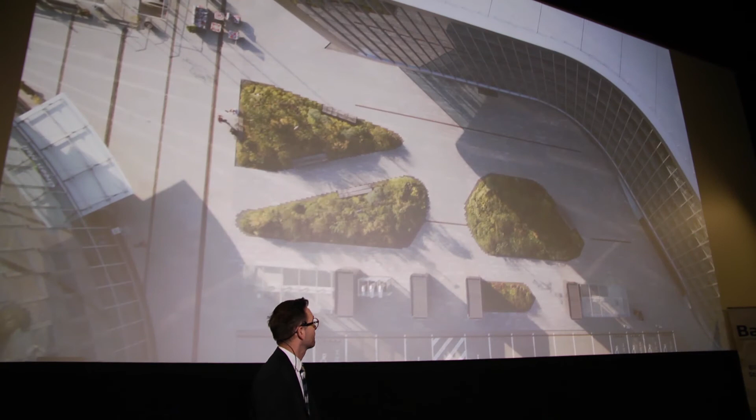And there's even a little bit on the landscaping.

The landscaping is something we've worked on a lot across all our projects. We strive for a very natural feel so it doesn't necessitate a lot of maintenance. The idea is that you're working and living in very ordered and controlled environments, which is a design with very mineral, strict geometry. The contrast between that and being able to come out and experience a landscape that's much more wild and free—we really like that contrast, for people to move through these different atmospheres.

So that was our first building. It was quite an ambitious first design to start with. When we counted the fee versus the hours spent, we maybe worked for like €1 an hour. But that's what you do as a young startup—you take an opportunity and make the best of it. This is the night image—I think it looks like the home of Darth Vader on Earth, if he was ever to live here.

Another project started with a master plan, for S7, and this is one of the early renderings, basically done back from the competition. Then this is one of the built images. As you know, there are two more buildings built there, and a fourth one being built now, taken over mostly by Danske Bank, and I believe Telia.

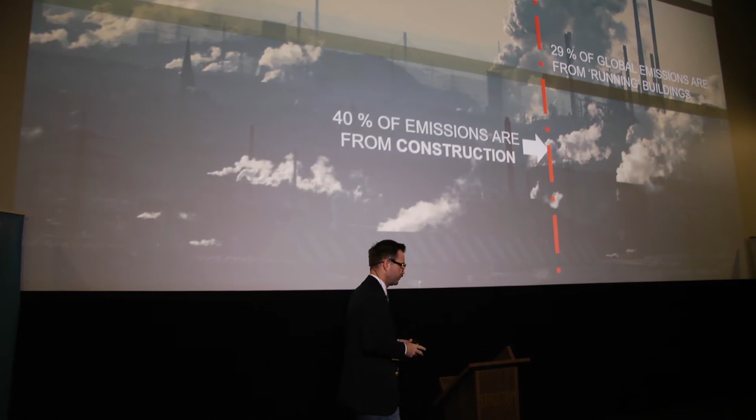As architects, we represent 40% of global CO2 emissions. In that slide there was some nice graphics showing that out of that 40%, 30% is basically maintenance of buildings, and 11% is the materials we're using. With the work we're doing on the office side, we're managing the maintenance of buildings and energy usage really well, through different types of certifications, and a lot of progress has been made on the mechanicals and so on. But what's really difficult is to do anything about the 11% of global CO2 emissions—which is basically glass, concrete, and things like that that are just enormously energy producing.

In that work we're trying something new, which unfortunately isn't a lot, but it's what we can do. I have this profound belief—some while ago it was pretty cool to smoke, and today it's a little bit less cool. I think tomorrow, clients and businesses that aren't doing certified buildings and aren't trying to push the boundaries of sustainability will somehow be seen in the same way.

There will be smokers and non-smokers. I think that will have a huge impact on the new generations that will be tenants in a few years' time, how they view these buildings and how they view the environment we're growing up in. I think we, or I, am maybe a bit older than some of you, but we're definitely in a transition period.

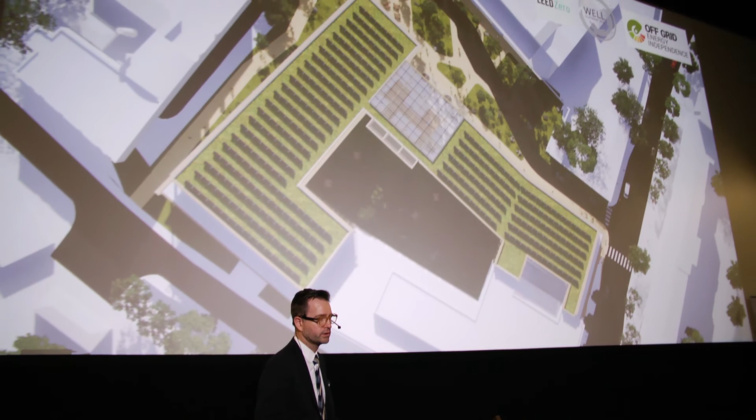So in Riga, we're doing this timber office. It's roughly 16,000 square meters of new timber construction. It's going for the new certificate called LEED Zero. There was LEED Platinum that most of you are probably familiar with. It's also aiming to be off-grid on the heating and cooling, as well as producing 20% of all its energy needs.

We would love if we could be fully off-grid, which was the client's wish and ambition for it, but that's not currently possible. There's also a WELL certification, which focuses on the interior of the building.

So what is a timber office building? Most of these timber constructions you might have seen come with an aluminum facade, and it's actually quite difficult to see that it is a timber building. Here we are working with a double skin facade, which allows us to have a very thin outer layer, and we are currently designing this double skin timber facade, which is a tricky thing to do.

The goal is that from the outside you can really get the feeling of a timber structure. Both from the outside and inside, the timber stands there and is also protected, so it doesn't turn gray or black with the weather. That's a beauty, but it's also probably seen by many people not working in design, architecture, and construction as something not so good when it turns gray or dark.

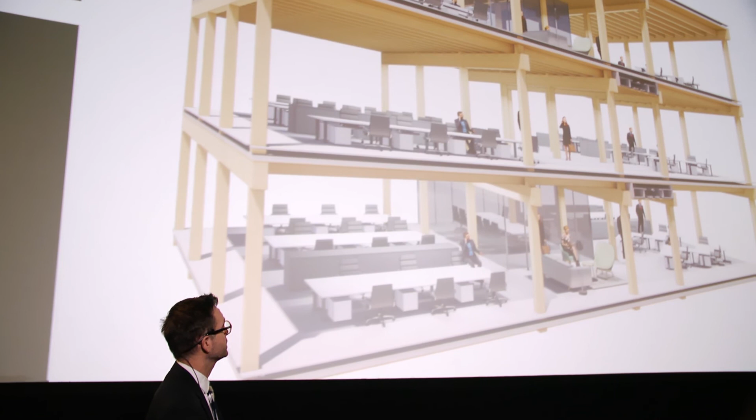This is the interior of a timber structure, and what's quite different from concrete structures is that you cannot make holes in beams. So you have to find good ways of navigating all your services within a timber structure. We came up with this idea that by introducing another column, we could break the beams.

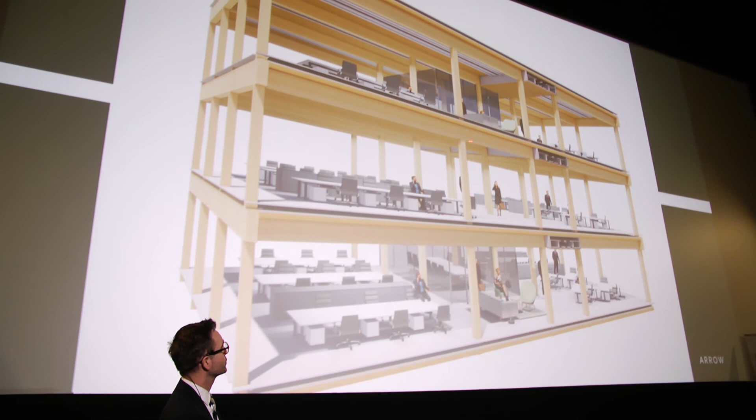This is the variation we're going with, so we could put up all the services, and they can go perpendicular to the facades, creating this very tall construction. We have approximately 3.20 meters to below the beams, and 3.60 below the slab, so it's going to be very generous in terms of environment for the employees there.

And then you have a lot of columns, and in concrete construction we're always like, oh, columns, I don't like it. But here it's wooden columns, and you're actually almost happy. You don't become a tree hugger, but you're almost getting there. So it's actually not such a big problem.

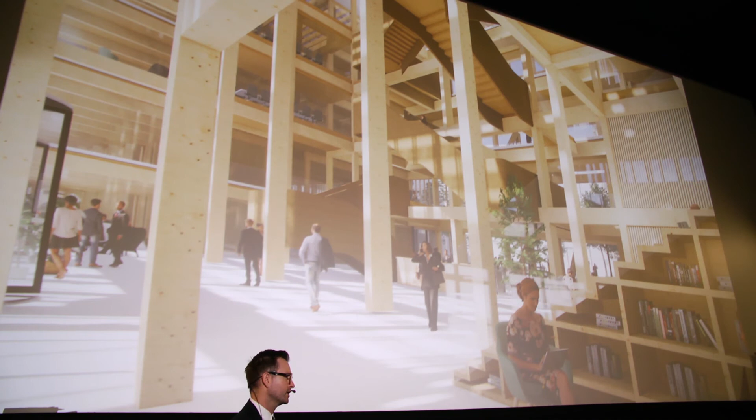This is the interior of the atrium, and we are currently working there. All dimensions are according to our engineer, so it's really quite slim construction, and they're actually a little bit larger than they should be in case of fire.

Wood has this incredible opportunity: when it's burning, it creates a black crust around it, and that protects it from burning further. So you count the structure you need, and then you count some extra centimeters that turn black, and that protects against fire actually much better than steel.

So we are using this. This is a fully Revit project, because contrary to concrete, when you make an error down the line, you cannot come with a drill and just drill through for coordinating things, because that's not how wood works. Wood is made in a factory, transported to site, and then mounted, so the importance of good coordination there is paramount, otherwise you end up in a mess.

Just some images of the interiors here, working projects. Okay, my presentation has gone through something. Just to wrap up, I have approximately 4 minutes.

Just another project I wanted to show you. This is a building in Warsaw that we have delivered for planning and detailed design. We hope that construction will start this summer.

What's quite interesting in this one is the base. So you could say that Scandinavian high-rise is maybe about how a building meets the ground. We as human beings can understand between 1 to 4 floors, and above that it becomes a bit abstract. So it's very much for us what we call the 80-20 rule—as a client, you focus your money on a specific place in the project so you can be simpler on a bigger part of it. That also happens to be the place where people are, so you're putting the money where most people benefit, which also makes the rest of the building simpler.

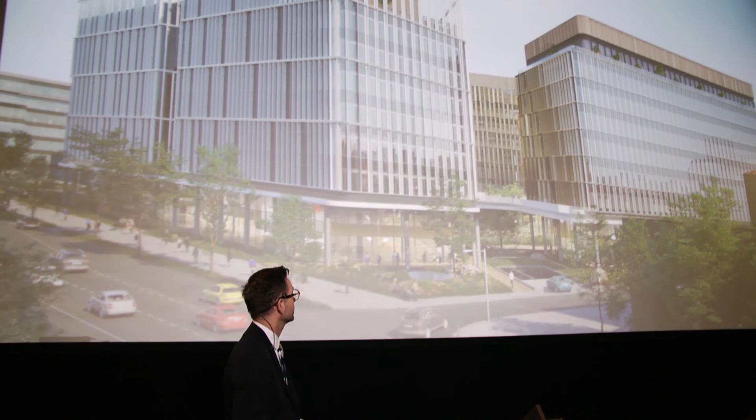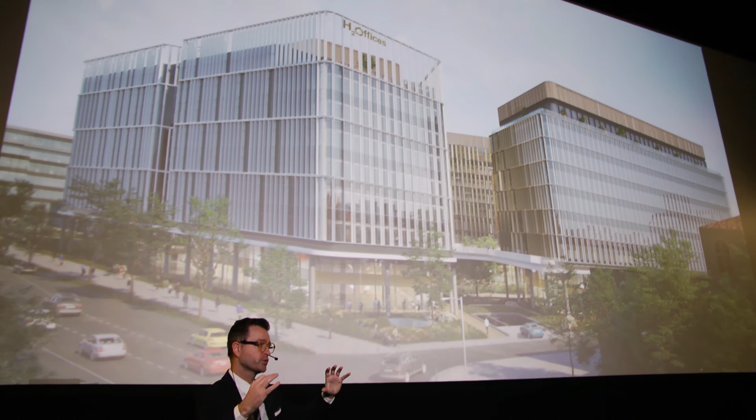This is another project we're doing in Budapest, which is interesting in the way it also works very much with the ground floor, in a different way. Basically, we are creating a cut between what is above and what is below, so that when people come into the project they have a different experience. I think that's important when you're up in a floor plate with open or cellular offices—when you come down for a break, it's not just the same facade going down to the ground, it really becomes something different. It becomes a different atmosphere, so you're switching off from working to taking a break.

It's a 120-meter long facade. The project is roughly 65,000 square meters.

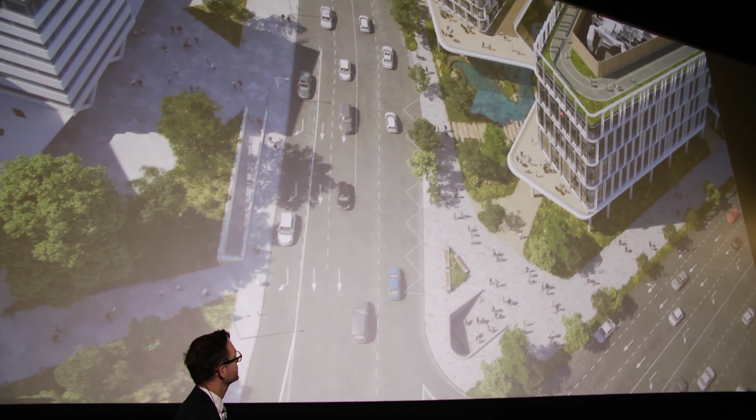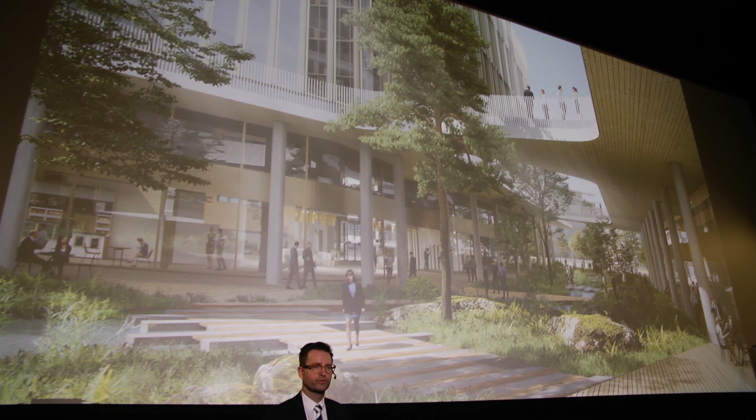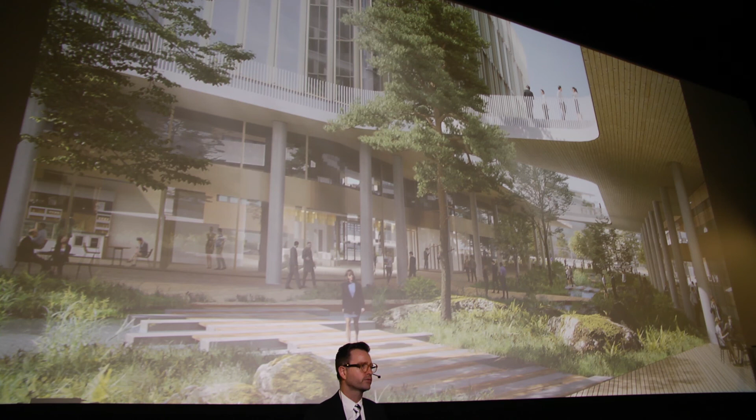So it has a quite interesting landscape approach—it's a green landscape, but when it rains, the whole landscape actually becomes blue. With our landscape architects, we designed it so the plants there can tolerate being underwater for a time. We collect all the water from the roof and everywhere, leading it down to this space, so we're slowing the water from entering the sewer system, because with heavy rainfall, sewage systems aren't designed anymore to take these large amounts due to climate change. So it's slowing down that runoff while becoming this blue environment, changing from green to blue, visualizing some of the sustainable approaches inside the project. It also happens to be an old waterworks, so we're creating a relationship back to the water itself.

There we have what we call the canopy, this large roof. The idea is that when you're down there, you have the feeling of being in a warm, different, more friendly environment that is connected very much with nature.

All of those projects are done in Revit, and we work with Revit at the office. As a designer, it's really not a great program, but it's the market that is dictating the choice of programs you can have. I'm really looking forward to, in a few years' time, when other players come into the fray and challenge that.

But when you're working cross-country with contractors and engineers, there tends to be a focus on what platform you're operating from. So while it gives a lot of freedom for us to coordinate much better, it also takes away some freedom of choice of what platform you want to work on. But we've definitely seen huge benefits in being able to coordinate projects. I think that's something I'm looking forward to—most companies going from saying 'yes, we are doing BIM' to actually being able to deliver it. For some projects in some countries, we're just at the very early stages of that.